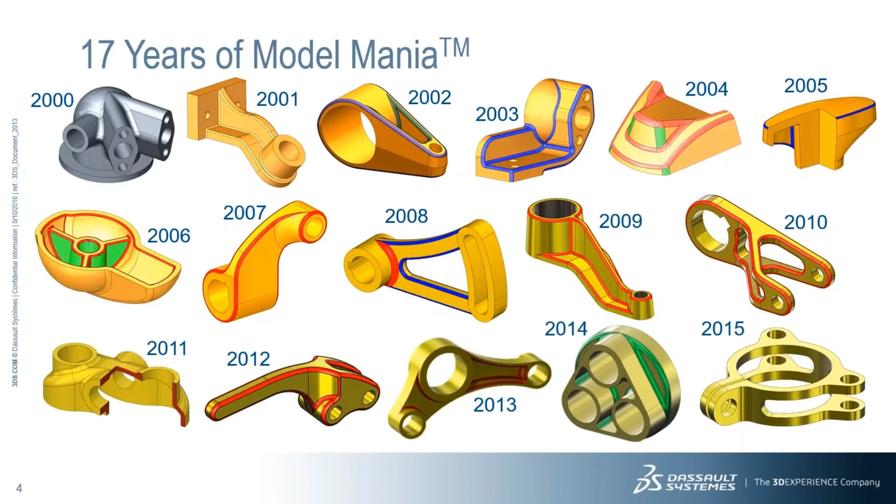There's really not that many features, and a lot of people can get them done within the 20-minute time limit. Once 20 minutes is up, you're timed out and asked to leave the booth if you haven't finished. So for 2016, this is our little part.

If you take a look at it, I always say people skilled at reading a drawing have a bit of an advantage, because you can look at the drawing and quickly determine how to approach it. In this case, it starts off with a teardrop shape that's going to be revolved, with some pockets at the top, another pocket at the bottom, and a couple of holes going into the sides at different areas.

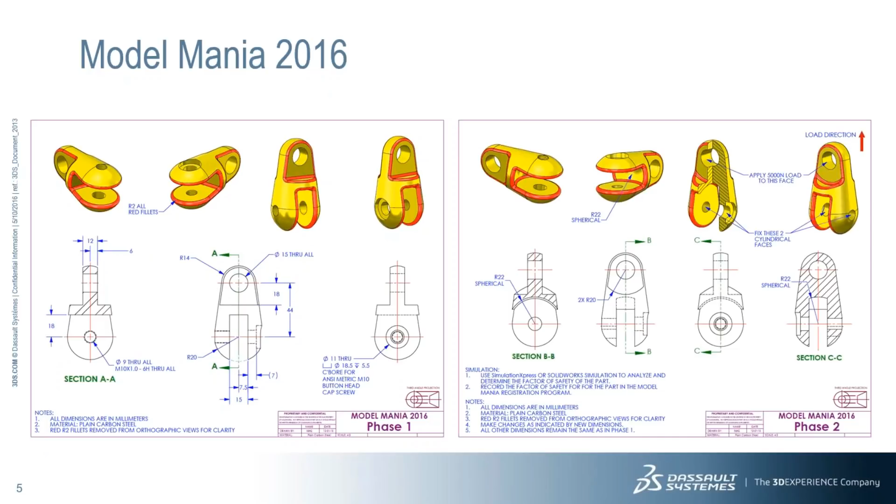Once you're done modeling that, we give you this drawing. This is the change that needs to be made, and it describes the simulation that needs to be run on the part as well. So we'll go through these two in more depth.

Here's our phase one part. A lot of times what we'll do for these is make the drawing very clear—we want to make sure people aren't trying to interpret it in different ways. So often we'll take off the fillets in the orthographic views just to make sure it's clear, and we'll identify that accordingly.

Once we remove the fillets, you can see you've got side pockets at the top, a pocket at the bottom, and that teardrop shape which is revolved. Then we define counterbore holes for a button head cap screw, and a tapped hole on the other side. This hole goes through one side, the tapped hole goes through the other, and there's just a simple 15mm hole at the top.

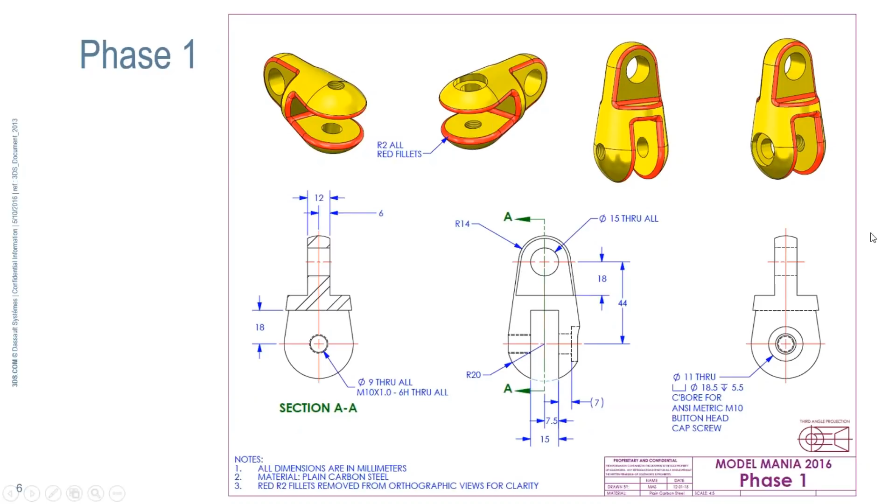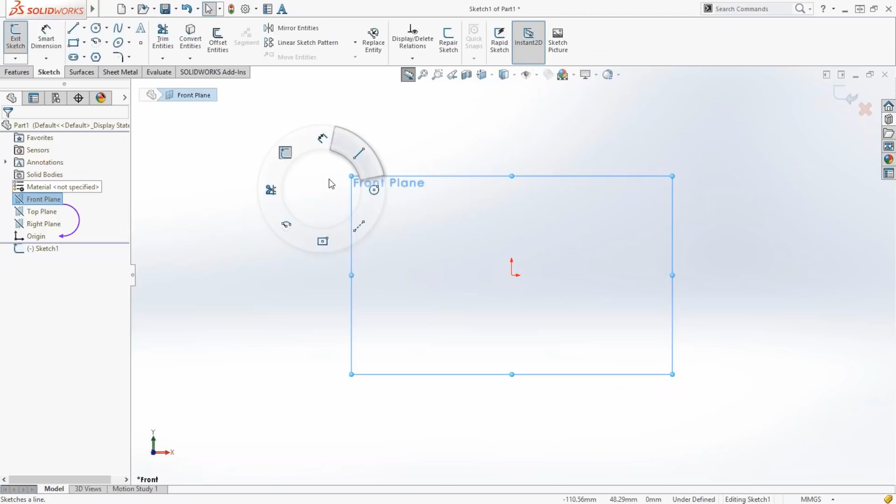So let's take a look at how we would approach modeling this. Since this question comes up nearly every time I do a webinar, I'll get it out of the way early—you'll see these things pop up on the screen as I go. If I jump into a sketch, you'll see this circular thing around my mouse. All I'm doing is right-clicking, holding down my right button, and moving my mouse around. If I swipe across that, I get to my line. That's called mouse gestures, and I'll talk about that in a second.

Another thing we have is what we call the shortcut toolbar. By hitting the S key, you have access to commonly used commands, and this is fully customizable. So let's go ahead and customize it. Here's your shortcuts bar—under customization, you can actually make any changes you might want.

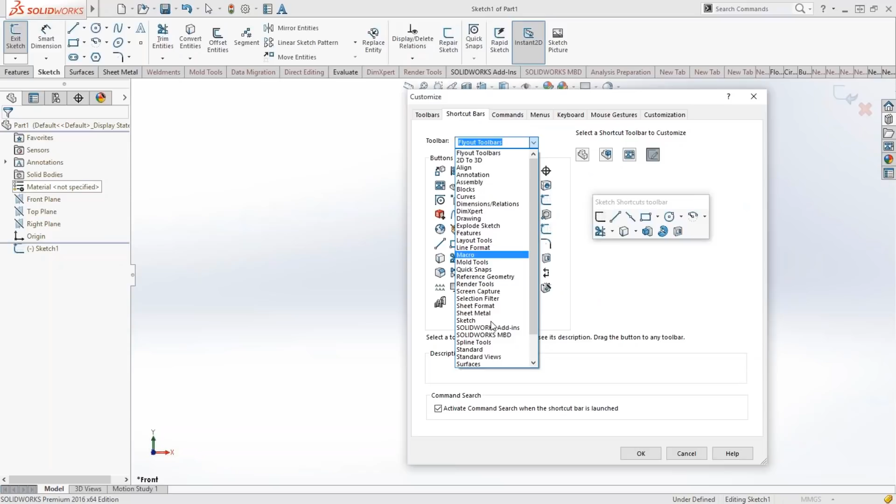You can add different things if you like. Let's go under sketch, and say you'd like to have your spline command on there—just drag it on, and if you don't like it, drag it off. These are also resizable depending on how you like to organize things. They're separate for sketch, for drawings, for part modeling, and assembly modeling, so you can have different shortcut toolbars for each, all customizable individually.

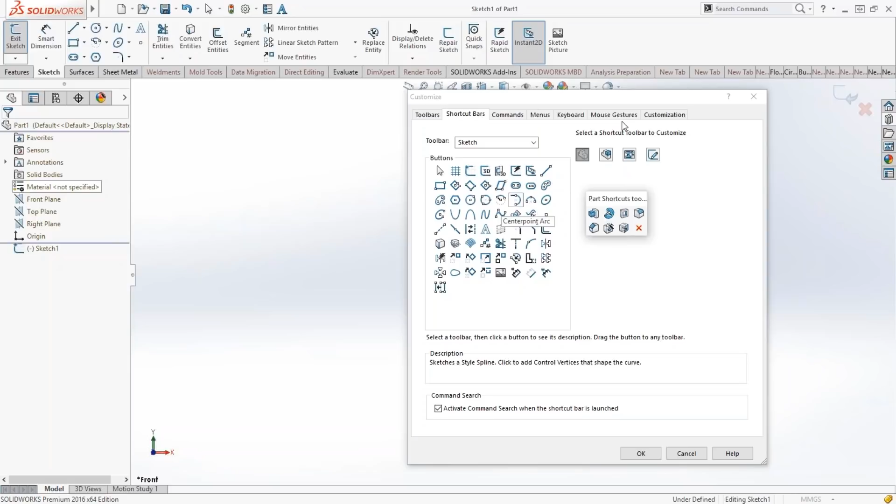Now the mouse gestures is this tab over here. I choose to have 8 gestures, but you can also just have 4 gestures in each quadrant if you want—just take a look at only the commands that have mouse gestures assigned.

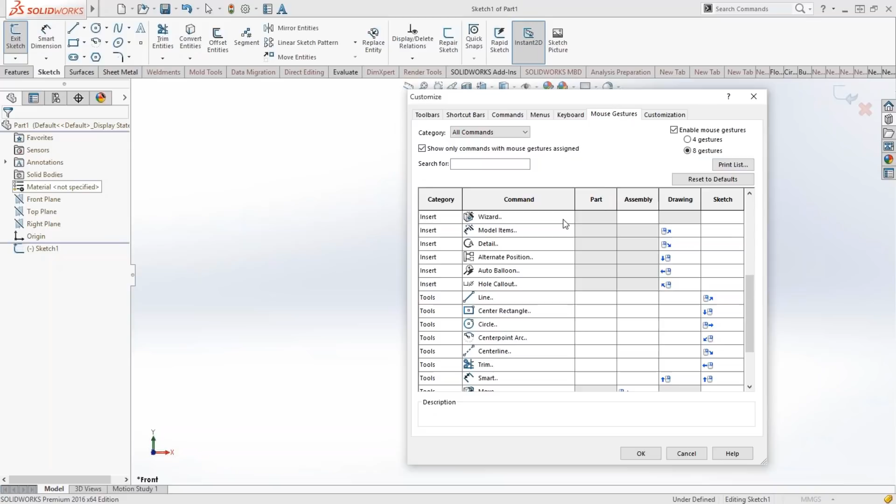Again, as we did before, parts, assemblies, drawings, and sketches can all be defined to have certain mouse gestures that are only in that environment you're in. So I'd encourage everybody to use the shortcut bar and the mouse gestures. Someone asked in an earlier seminar which one's more efficient—it's all personal preference. Some people use all gestures, some use all shortcut bar, I use both, so there's no one great answer. You'll see me using mouse gestures as I go through here, so don't be surprised when certain things pop up. I'm going to start by drawing a line.

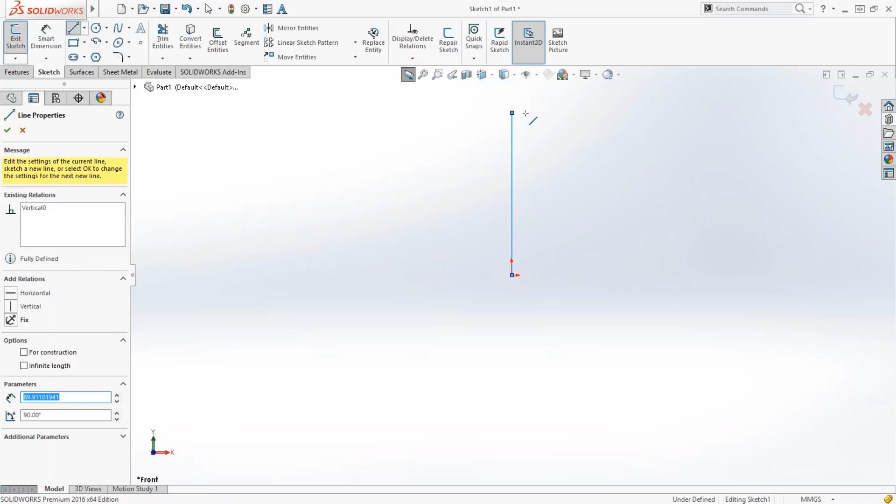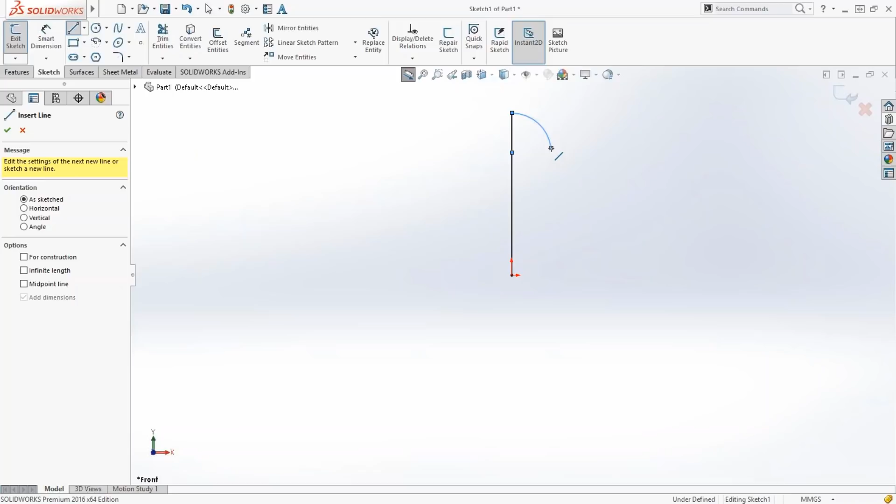I'm just going to draw a vertical line up here. Still in the line command, if I move my mouse, I'm drawing a line, but if I come back to that vertex, I transition into an arc. Come back to the vertex, go up here—it's a tangent arc, go this way, go that way, come back this way, however I want. I just want to draw an arc like this. It's a quick and easy way to stay inside the sketch without choosing a different arc tool. I'm still inside the line command, picking up tangency off that arc, going back to that vertex again, and creating the final tangent arc at the bottom.

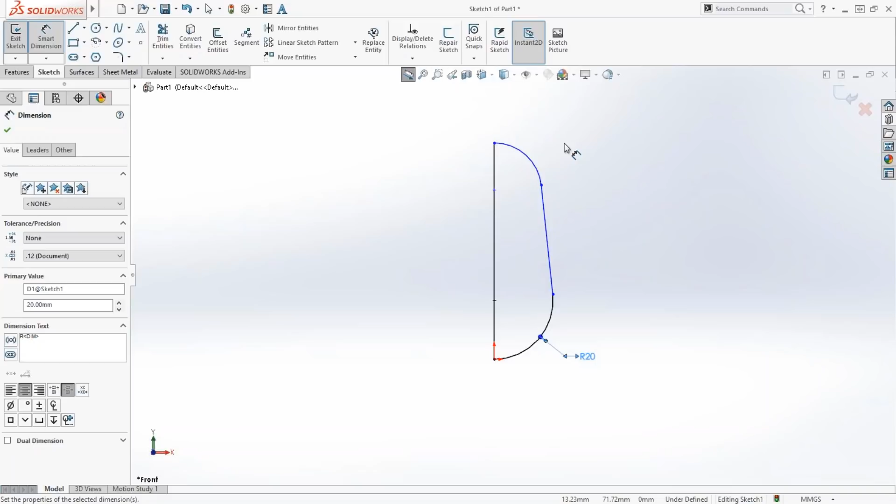Let's make these two coincident, and then we'll add some dimensions. At the bottom here, this is going to be 20, this one's going to be 14, and this dimension between centers is going to be 44.

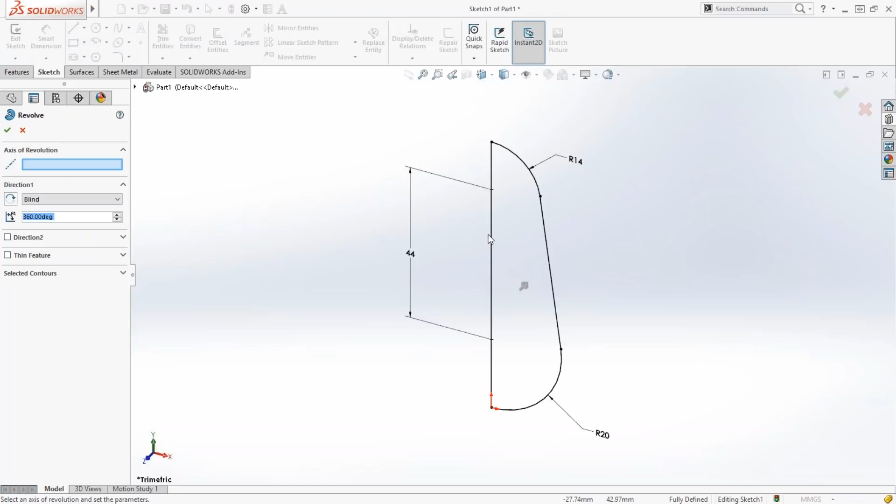So that's that. On the shortcut bar and even on my sketch toolbar, I have commonly used feature commands such as the revolve, the extrude, and the extruded cut. So I'll just choose the revolve command. My axis of revolution—you can draw in a center line or select any linear entity you have in your model—and go ahead and create your first feature.

So what I'm going to do is actually turn this sketch on. Let's see if I have my sketches turned off—I do. So I'm going to turn that sketch on, and you can see I can see my sketch and use this vertex and these vertices for dimensioning. On the front plane I'm just going to sketch in a rectangle.

This rectangle is just going to be something like this. I'm going to grab that midpoint there, if you will, and just drag it and snap it on there. That establishes my symmetry for my model. We'll add a dimension down here and make that 15. And from the center of my arc, which is the center of the arc I drew previously, up to here, that's going to be 18 millimeters. A fully defined sketch turns black, so I know it's fully defined.

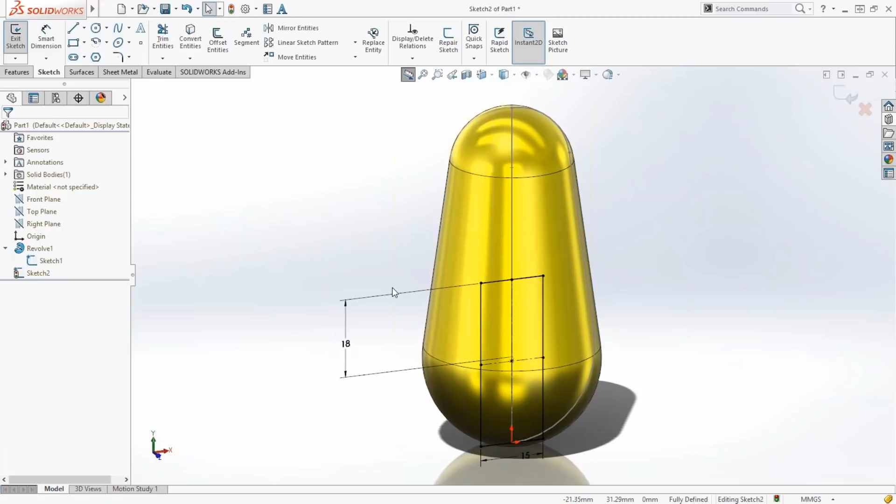And then we'll create an extruded cut. This is going to be through all, both directions. And then it cuts my pocket away—pretty simple, pretty straightforward there.

Now the next feature is these little pockets at the top. The way I originally created this model, I drew a rectangle in from this vertex up to there and mirrored it over to the other side and cut everything away. That's one way to approach it. I'm going to show you a different way, and it will actually help me down the road and give you a couple tips and tricks on the benefits of doing it that way.

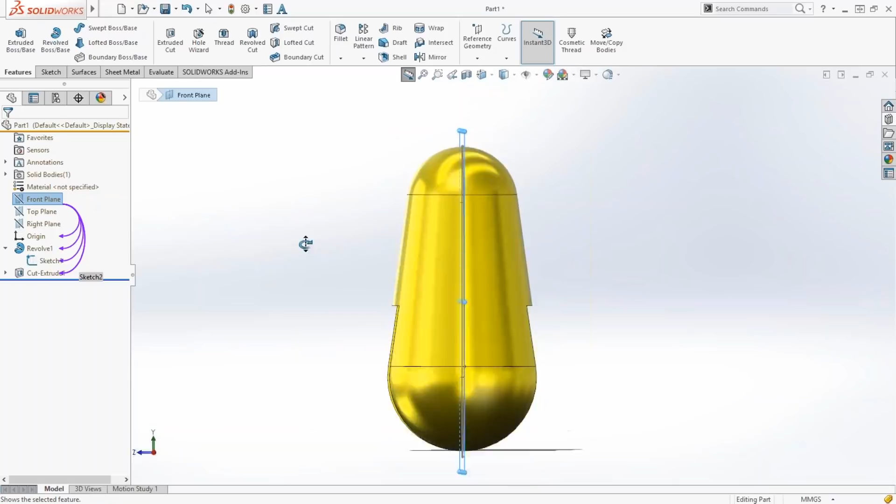So let's jump on the front plane here. That's the center of my model, and I'm going to go ahead and create a sketch. I'm just going to create a rectangle—nothing special here, something like that, real big.

I don't even need to locate it. I don't need to define it. The only thing I really need to define is from the center to the bottom, and that's going to be 18, again, just as it was at the bottom, to create that pocket.

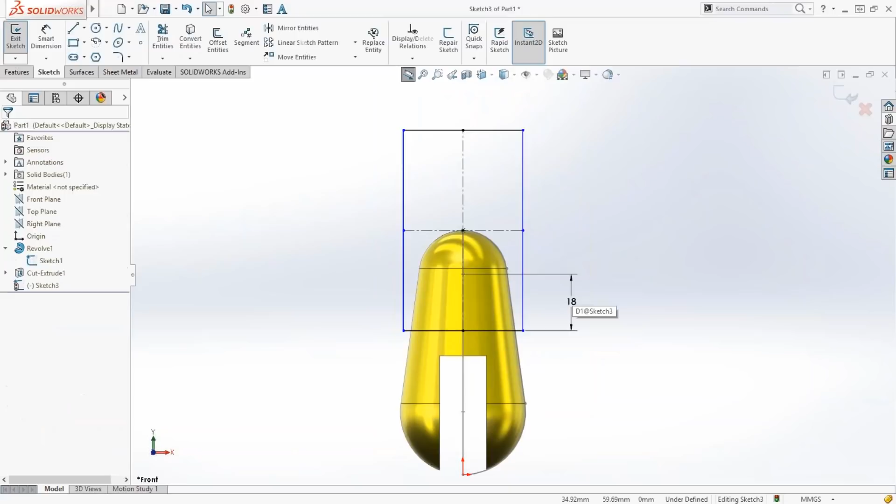Now remember, this sketch is on the front plane, but I don't really want to start cutting from my front plane. And that's okay, because SolidWorks has a really cool tool to help with that. I'm going to change the direction and say through all. So again, you can see it's trying to cut through all. I really don't want that, but I want to change my from option here.

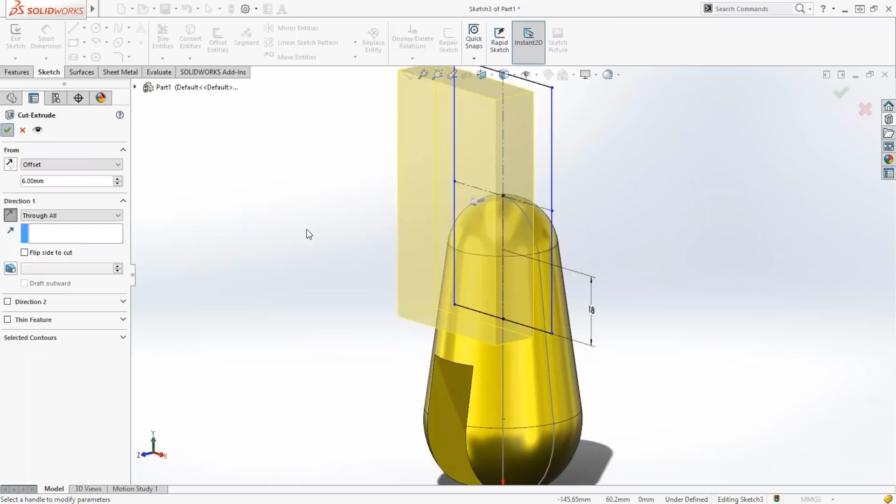I don't want to start extruding from the sketch plane. I want to offset that by 6 millimeters. So what I'm doing is still keeping that sketch, and I guess the big benefit here is I don't have to create a plane or use reference geometry to create that offset plane 6 millimeters. Just saves a step there. And the nice thing is I still have access to that dimension, so if I wanted to change that offset, I can do that directly.

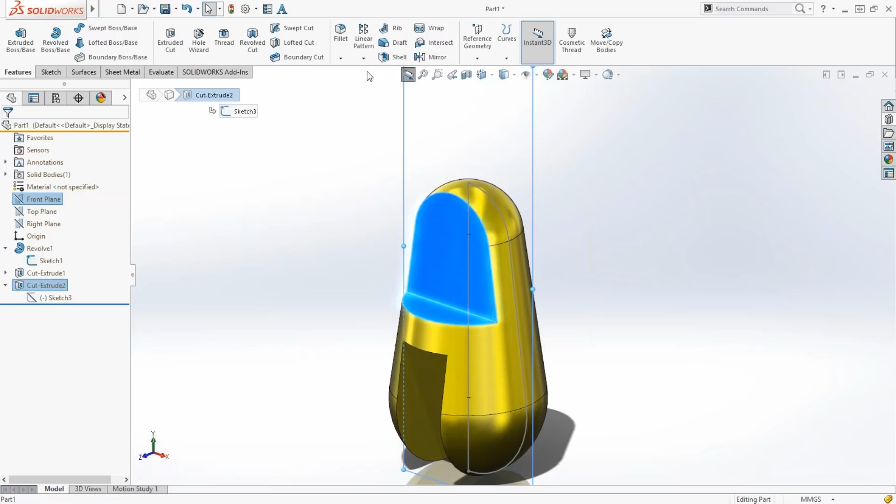Okay, so I think everybody knows here we're going to mirror that to the other side. Pretty straightforward there, no problem.

On this face, I'm going to create a hole. So it's asking - we have a 15 millimeter through all hole, and then we have these 10 millimeter counterbore for a 10 millimeter button head cap screw, and likewise the tap hole for M10 by 1 thread. So we'll put those on next.

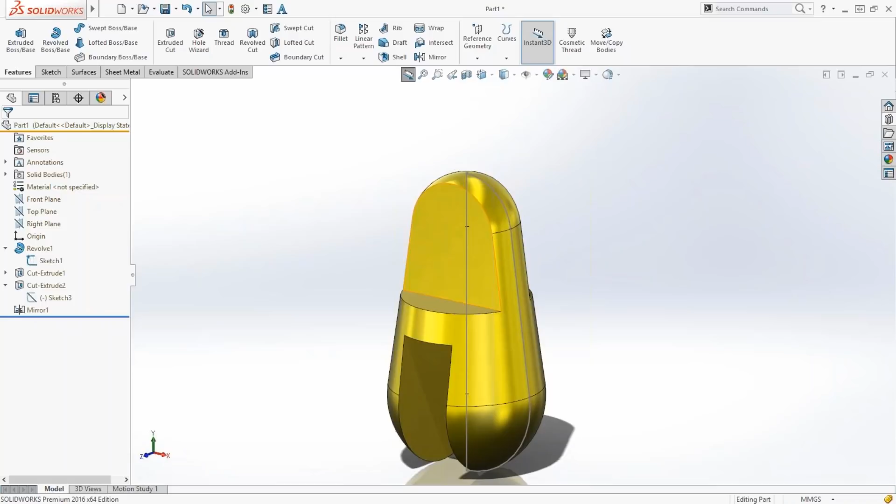So on this face here, I'll create a sketch. Now, I'm going to draw a circle, and you'll see what happens, and then I'll go back and undo some things. I'll choose that, just size out my hole, and I'll just type in 15. What that's done is it's automatically added the dimension while I'm sketching.

So how did that happen? If I just right-click in the graphics area here, you see this item called Sketch Numeric Input. If I turn that off and draw a circle and try to type in the value, it doesn't add the dimension automatically. But if I turn it on, it does.

So let me take a deeper look at what that is. In your system options, under tools options, you go to your sketch, and then you have this 'enable on-screen numeric input on entity creation.' I like to check the second one here because it only creates a dimension when a value is entered. So I'll choose both of those.

So now if I draw a circle and I don't put in a value, it doesn't add a dimension. If I do, it does add the dimension. So it's just saving me a step of having to add those dimensions while I'm sketching. While I'm sketching that entity, I key in the precise value, and it adds the dimension for me. So it's kind of nice that way.

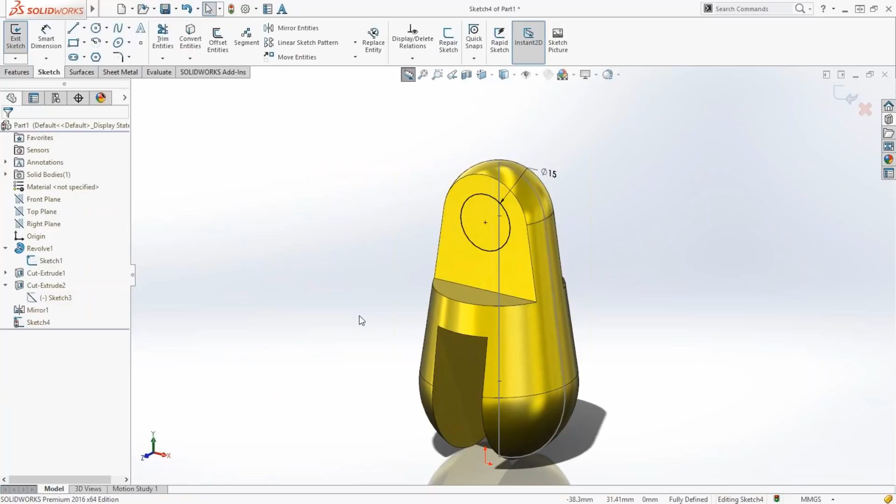We'll extrude cut, and we'll go through all, accept that. So there's that pocket there. Now what we need to do is create those holes at the bottom.

For this, we're going to use the hole wizard. Hope everybody's familiar with the hole wizard - I like to think of it as my machinery's handbook. All the information that sizes the holes, what the proper size is for a clearance hole for a 1/4-20 socket head cap screw, or an M10 button head cap screw. I don't have to look any of that stuff up or go to my slide chart or whatever.

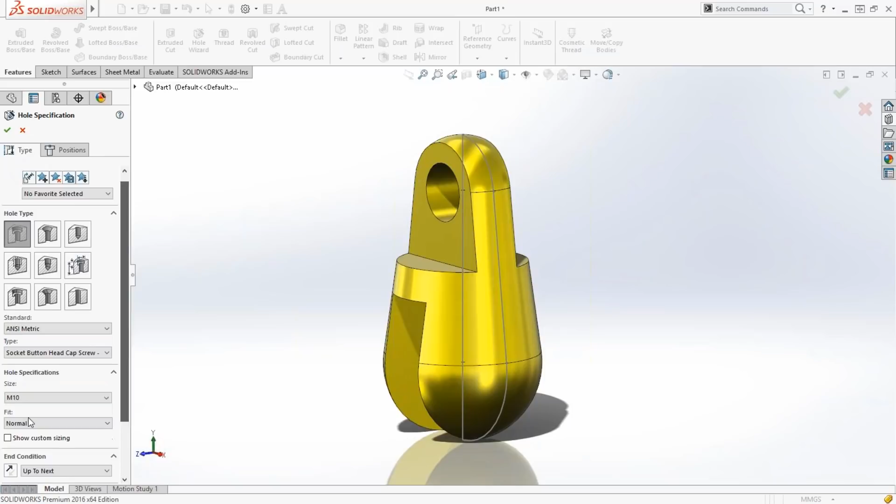So here we have an ANSI metric. I want a button head cap screw. This is going to be M10, and I want that to go up to next, because I only want to go through one side. I'm going to need to place this onto this spherical face here.

So you don't always have to place your hole wizard holes onto a planar face. You can place them onto a non-planar face as well. To do that, you can choose the 3D sketch button, or I'm just going to click this face here, and it automatically knows that I'm placing this onto a non-planar face, and then I'll place my hole right there. So that's pretty simple. If I look at the relation that exists for this, it is an on-surface relation - it knows that it's on the surface.

The other interesting thing about placing using hole wizard on non-planar faces is that instead of creating the first location sketch as a 2D sketch, it creates it as a 3D sketch. So now I'm in the 3D sketch environment, using the 3D sketch relation tools as well.

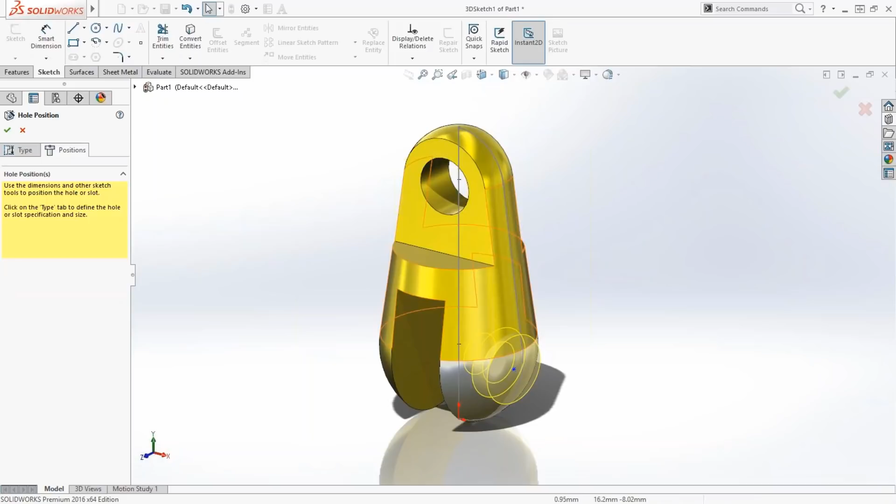Here's my x-axis, and here's the center of my arc. So I'm just going to align these along x. That's a relation available inside of the 3D sketch environment. You can see my point turns black, which means it's fully defined.

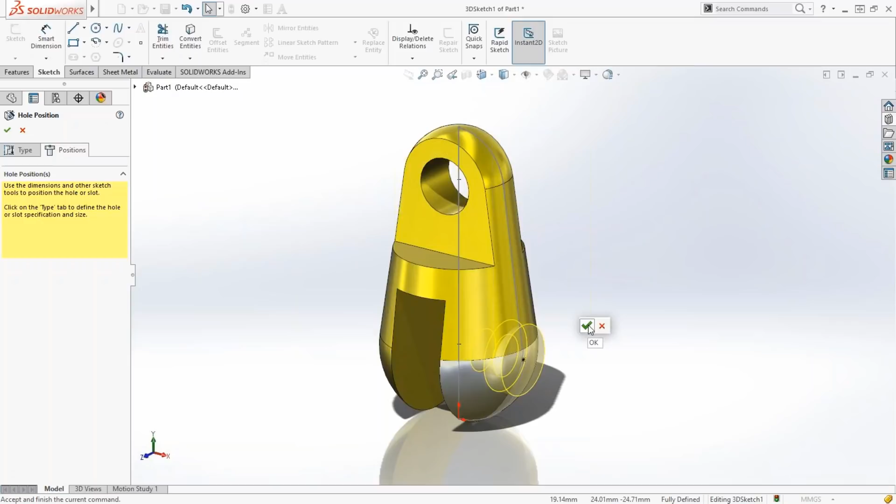If I hit the D key—actually, I'll undo that. Notice we have the confirmation corner. I can hit OK to get out of my sketch and finish the command, but sometimes I don't like to move my mouse all the way up there. So hitting the D key brings the confirmation corner to your mouse, so I can hit OK or cancel without having to move my mouse around. That's a nice little accelerator that helps you be more productive and keep your mouse movement down.

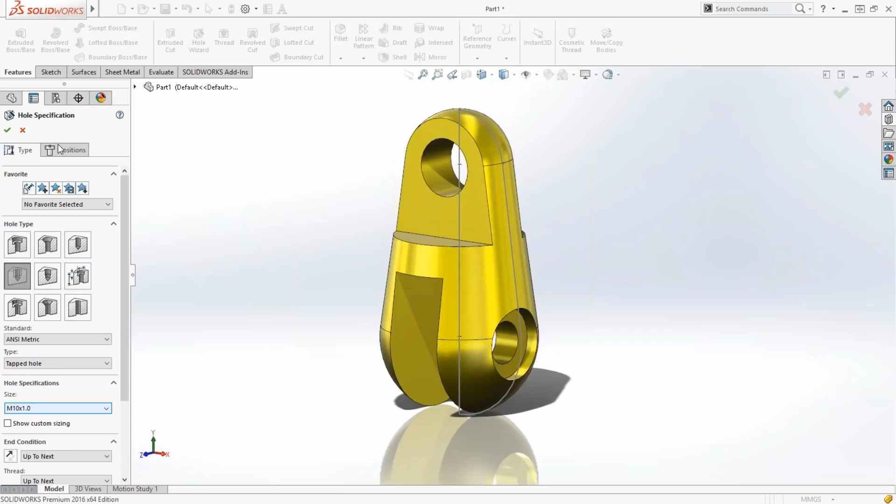On the inside here, we're going to create another hole wizard hole, and this one is going to be a tapped hole, ANSI metric, M10 by 1, up to next is fine. We'll use the positioning—I'm going to place it on a planar face and just place it right there.

Here I'm going to line these two up and give a coincident relationship for those two, so that lines up properly. Hit the D key and we'll hit OK. So there's the geometry that we have without the fillets on.

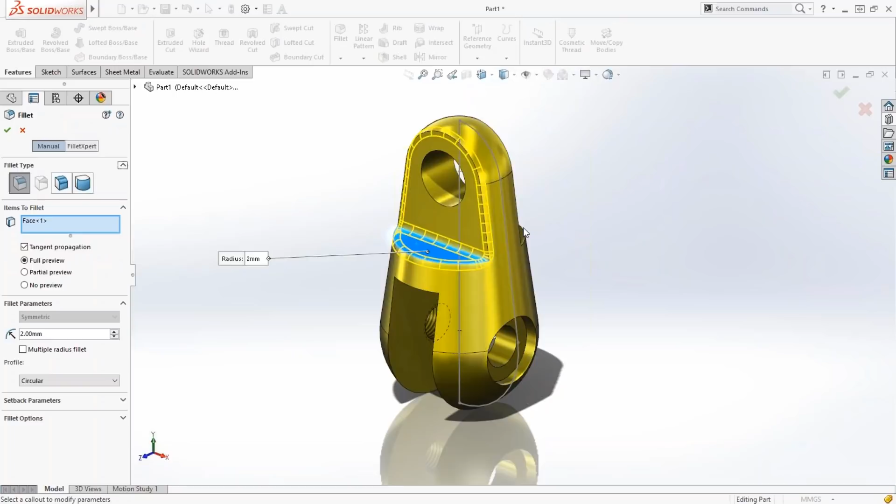Then the last thing we want to do is add these fillets. You can see these fillets wrap all the way around, all the way around, and all the way around that. So let's go ahead and add our fillets—it's going to be a 2mm fillet. I'm going to choose just these faces here, and notice it wraps around because it's grabbing all the edges associated with that face, but any tangency as well.

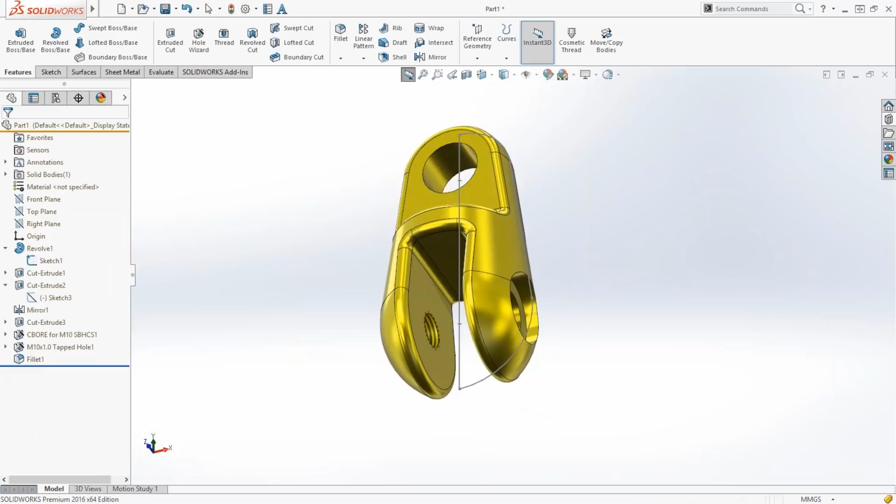If I choose this, it's going to give me a fillet around that circle or hole there, and I don't want that, so I'll unselect it. Finally, down here we'll choose this face as well, and you can see it added all the fillets properly. This isn't necessary, but especially for Model Mania, I like to add a little color to these because it helps me visualize and see whether I have all my fillets accounted for, and whether I got all the edges prescribed on the drawing to be filleted.

Then the last thing we need to do is add plain carbon steel. On your right click, you have all your favorites listed here. If you ever go to SolidWorks World and sit down to try the Model Mania challenge, a tip here is that I always put the material in your favorites so you don't have to go into edit material. If at home you want your own favorites, just go into Edit Material.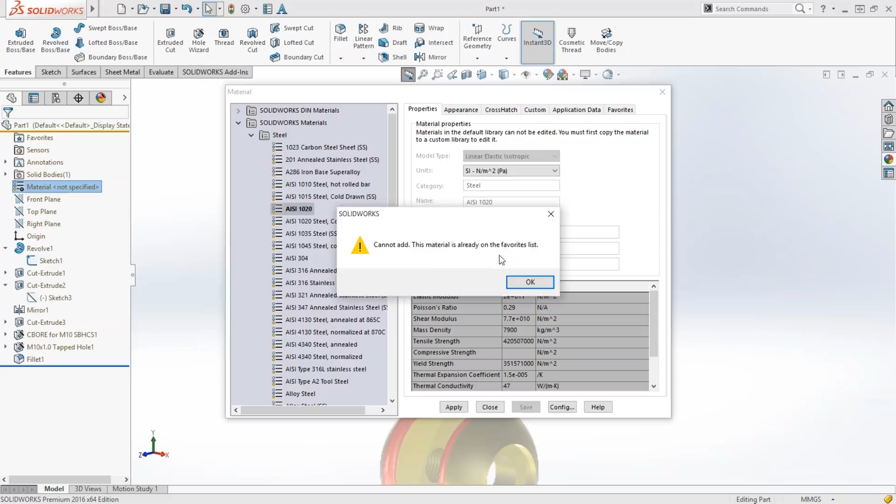Here you have your list of all available materials. Choose one like this, right-click on it, and say Add to Favorites. If you click Add to Favorites, it's already on the favorites list. This tab over here has all your favorites already there. So if you have certain materials you use quite often and don't want to come into this dialog box very often, add them to your favorites, and then they're right there on your right click to add your material.

So that's the phase 1 portion of Model Mania 2016. We've got our part all done. Once you're done with that, we give you another drawing, which shows some changes that we're going to make to that part. So here's the changes that we're going to make.

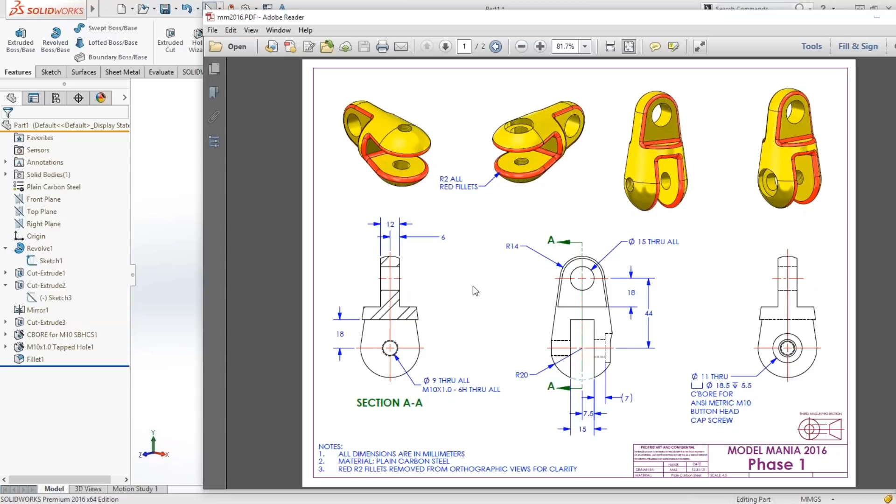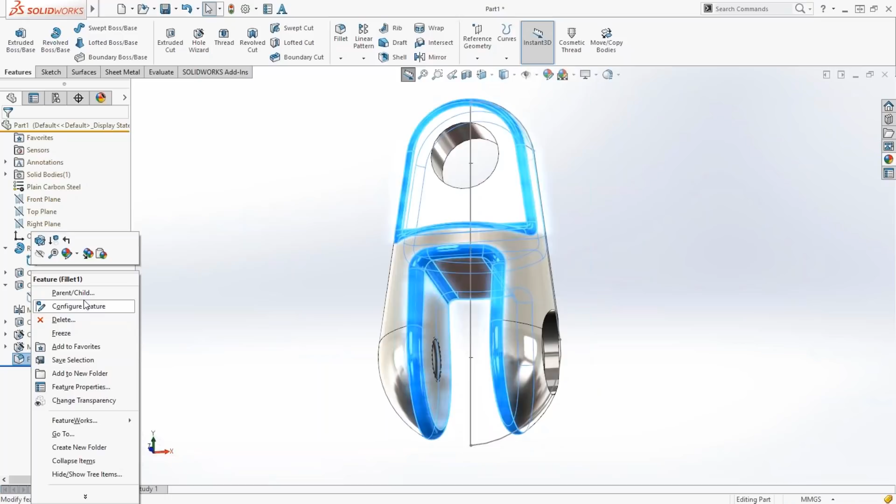So that's that. Here's the simulation. We'll come back and talk about that once I get the modeling done. So how are we going to approach this? This face needs to go away and needs to become cylindrical. This face needs to go away and needs to become spherical.

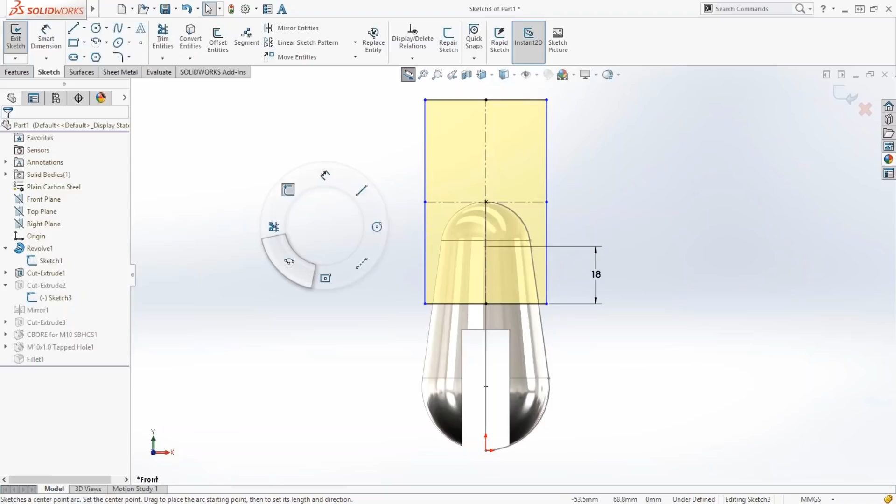So first one first, let's take the easy one. This one's going to be easy, because of the way I define this, it's actually fairly simple. I'm going to come in here, and I'm actually going to do this the wrong way because I want to show you a little capability that we have. So if I take this here and say, okay, I want to put that 20 millimeter arc on there, let's just draw in a center point arc from the center, from here out to there. That's my arc.

Some people on the phone are saying, no Mark, don't delete that line, that's not the right way to do it. You're right, that isn't the right way to do it. But I'm going to do it the wrong way in case some people aren't familiar with this.

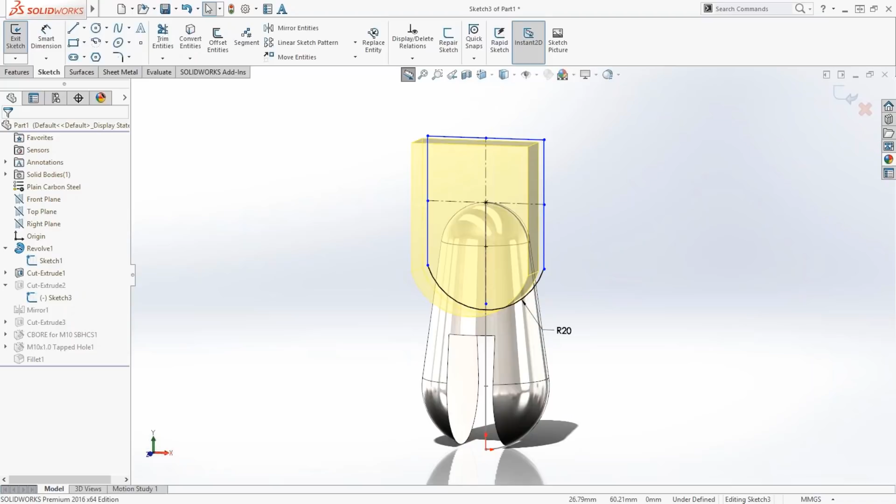So I deleted the line, I put R20 on there. I don't really worry about any of those up there, and I hit exit. So what happens? My fillet fails. Well, that's because I replaced that line with an arc, and it didn't know to swap those out. So I'm going to use the undo command and come all the way back here to my sketch delete.

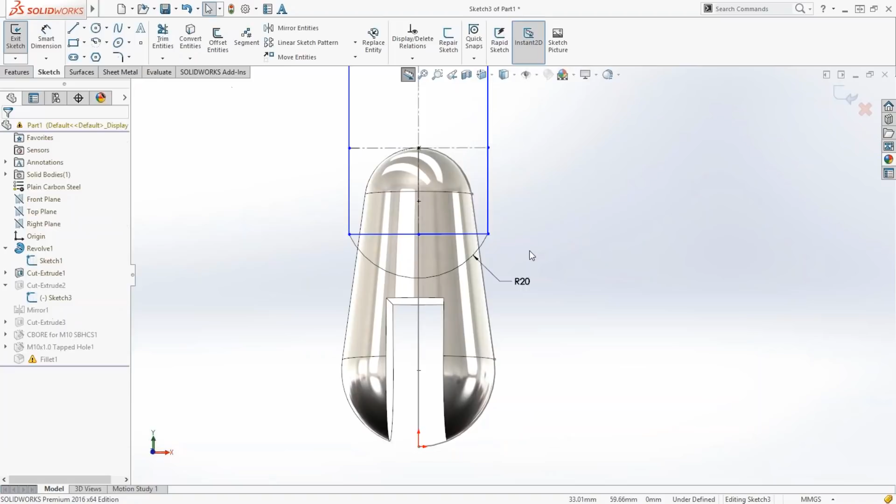So here I am at sketch delete. I'm going to delete this dimension, and we'll put on the 20 millimeter dimension, something like that. So the better way to approach this is to use the replace entity. So I can choose this guy right here, and I can say I want to use replace entity. Replace entity, replace this entity with this one, and I can either choose to delete that entity or make it construction. We'll leave it construction for now.

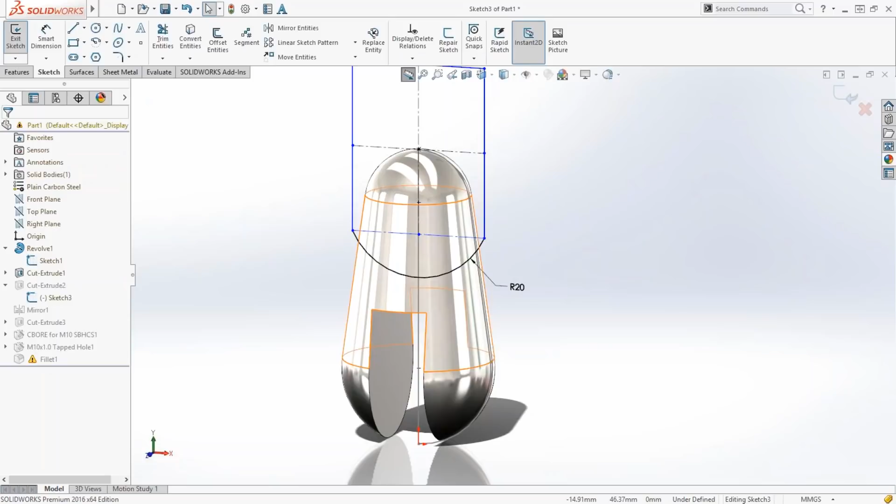So I want to replace it with this one. So what I'm doing is I'm telling SolidWorks, redefine whatever was associated with that edge to now be tied to that line, whatever that created a planar face, to now assign it to this one, and now it's going to take care of that for me. So you can see it made that construction. This is now an arc or a cylindrical face, so when I exit out of my sketch, my fillets don't fail because the face identifier for this particular face was reassigned, and SolidWorks took care of working out the fillets for me.

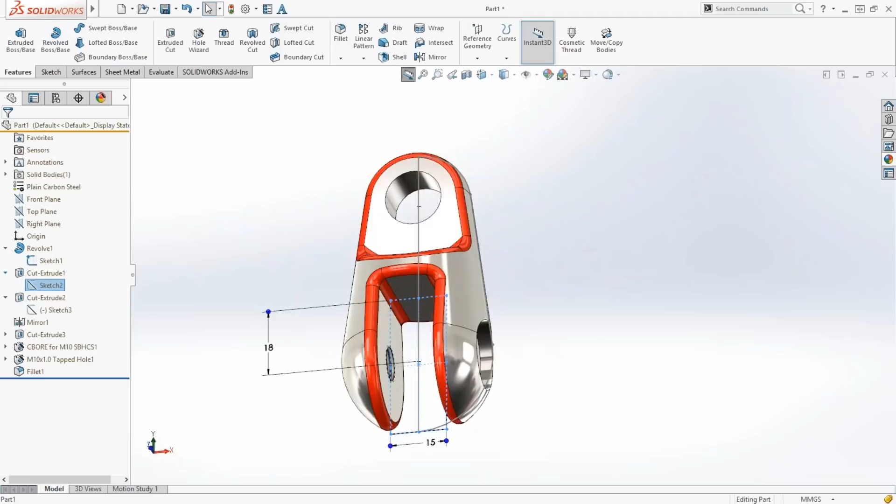Not going to be that easy for this spherical face down here. The way I defined this from our previous sketch here is a rectangular cut, went through my model. I could try to go in here and change it, delete it as an extrude, try to change it to a revolve. I can do all kinds of things like that, but it gets a little bit more involved. So I'm just going to roll back before that fillet there, and I'm going to define a spherical surface.

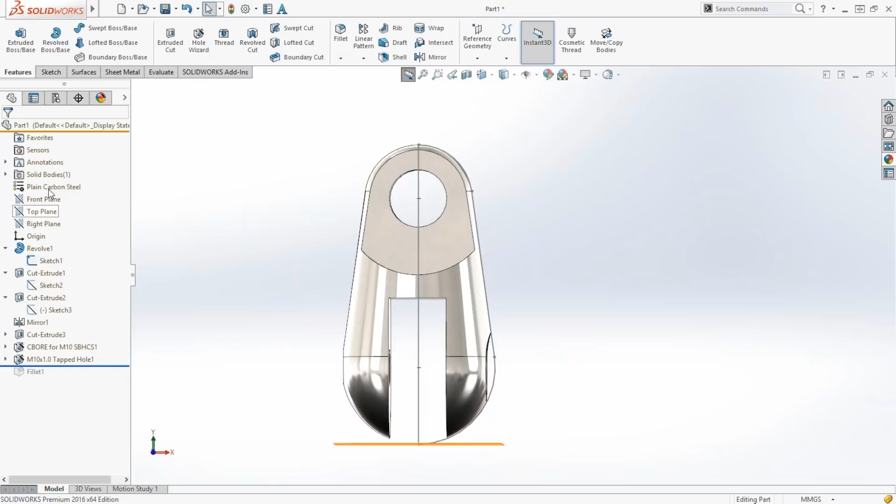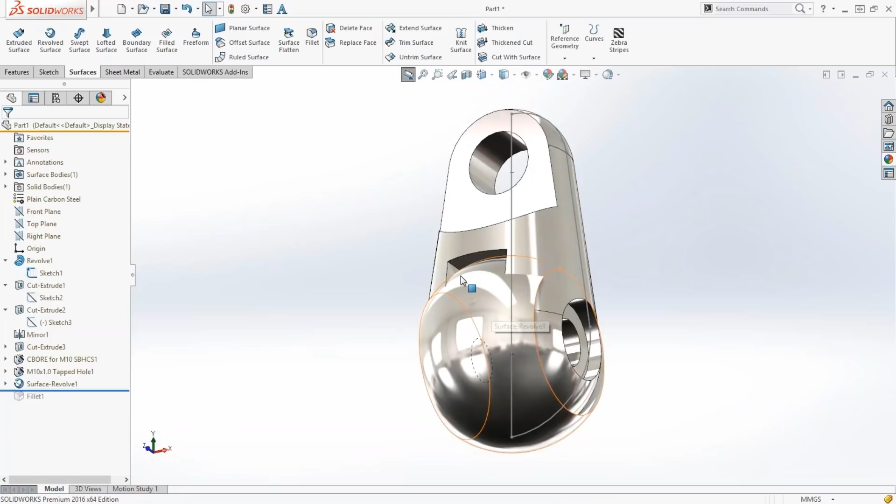So instead of a solid entity, I'm going to define a spherical surface. We'll sketch in a center point arc from here to here, something like that. It's going to be 22 millimeters. And we'll put in a center line, and we'll revolve that as a surface. So that's now a surface that I've placed into my model to replace a face. The Replace Face feature on your Surfaces Command Manager tab is the tool that we want to use.

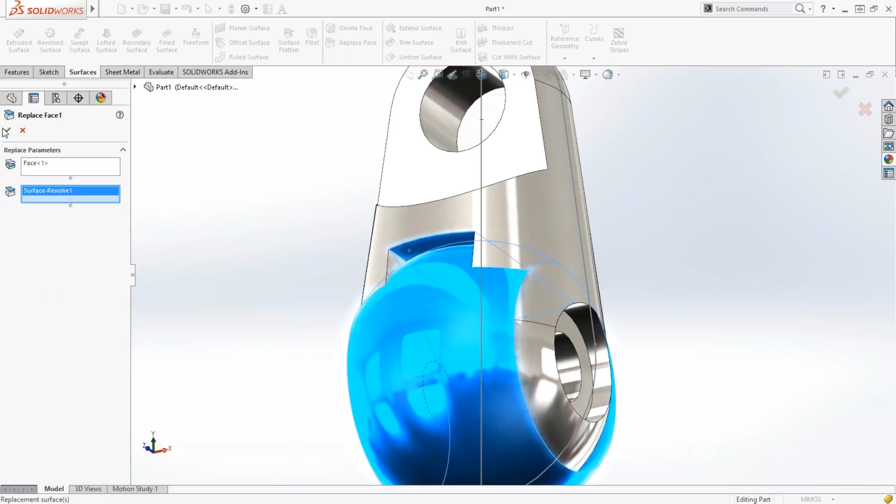I'm going to replace a solid surface with a face from the surface that I just created. So I want to replace this with this, and I'll hit, oops, I'm going to replace this with this. So I'm replacing one with a different surface, and you'll see what happens. So it actually replaced that. I could hide this, or I could just hit the Tab key. Tab key works now in part mode, very similar to the way it works in assemblies.

You can hide a part in assemblies. Well, now you can hide bodies, surfaces or solid bodies, inside of part mode.

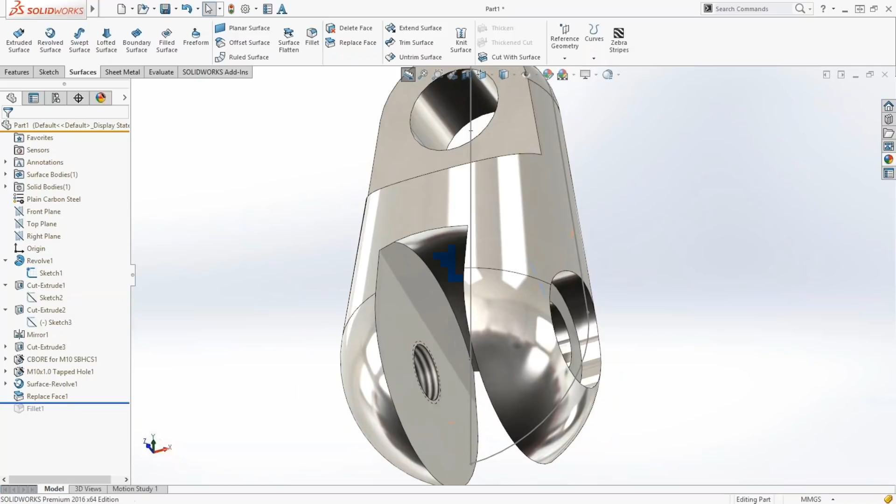So you can see I used replace face to actually redefine that face to now be spherical. When I rebuild my fillet, I changed the face.

The face IDs don't match back up when I do it that way, but I can easily redefine that. You can see it's got a missing face. I could delete that, but I tend to be lazy, so I'll just hit enter and let SolidWorks remove that for me. You can see it did a nice job there.

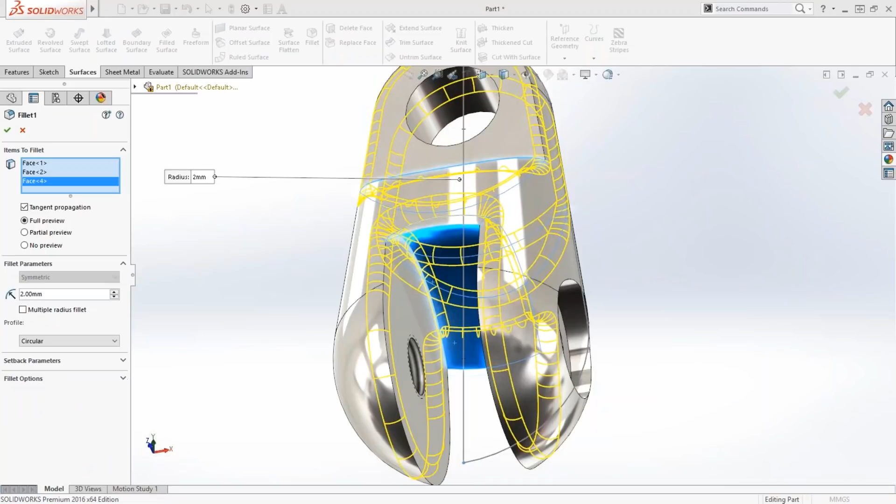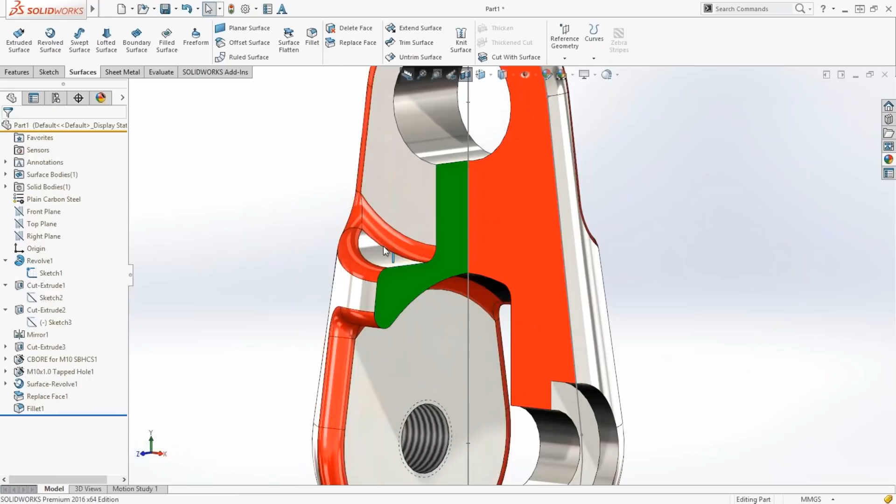You can cut a cross section of this. If you just did a standard planar two-section cross section, you can see that I now have that. Or if I use the zonal option up here, it allows me to just make that quarter cut section, which is kind of nice. You can see I now have my cylindrical face here and my spherical face on the bottom. That works out pretty well.

So once we get that done, we ask you to run simulation. We're asking you to hold these cylindrical faces, these two cylindrical faces, and then apply a 5,000 Newton load in the vertical direction. So let's jump over here.

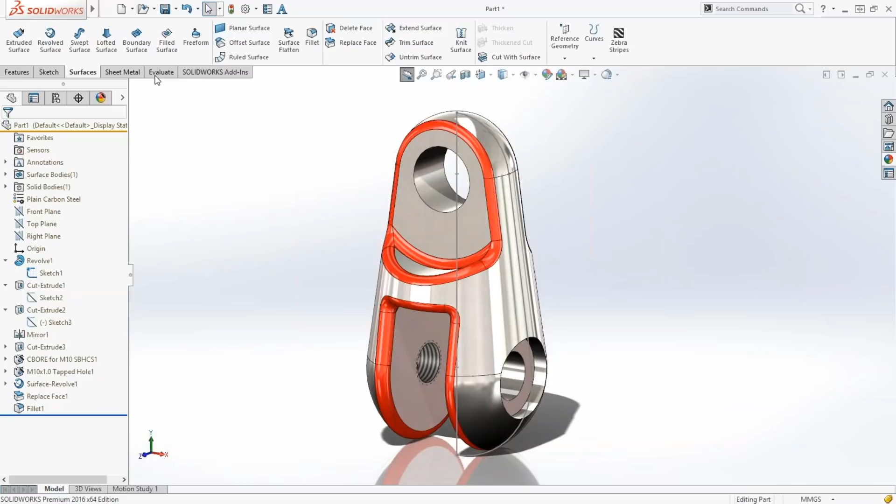I could use SolidWorks Simulation. I'll actually use SolidWorks SimulationXpress because a lot of people aren't familiar with it. I just want to show you how easy simulation can be.

So the first thing it does is take you through this wizard. It gives you a little bit of introduction that you can read through. Hit the next arrow, and you can see I've got fixtures to define, loads and materials already defined, and then we'll hit run and view our results.

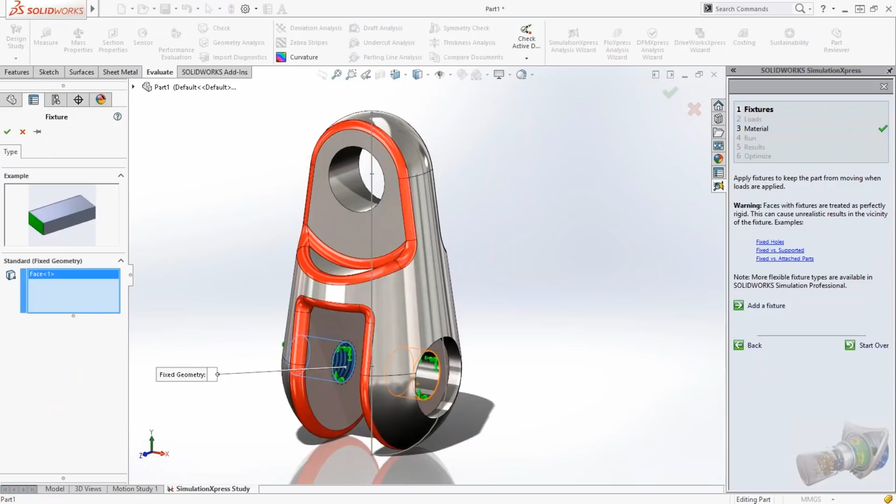So let's add a fixture. I want to hold this and this. Okay, now we say next. I'm going to add a force. You can see it added the nice little icons there to let me know that's fixed.

I'm going to add a force to this face, but I don't want it to be normal to the face, I want it to be in a selected direction. That direction is going to be to the top. I want 5,000 newtons. So there's my load, you can see that's on there.

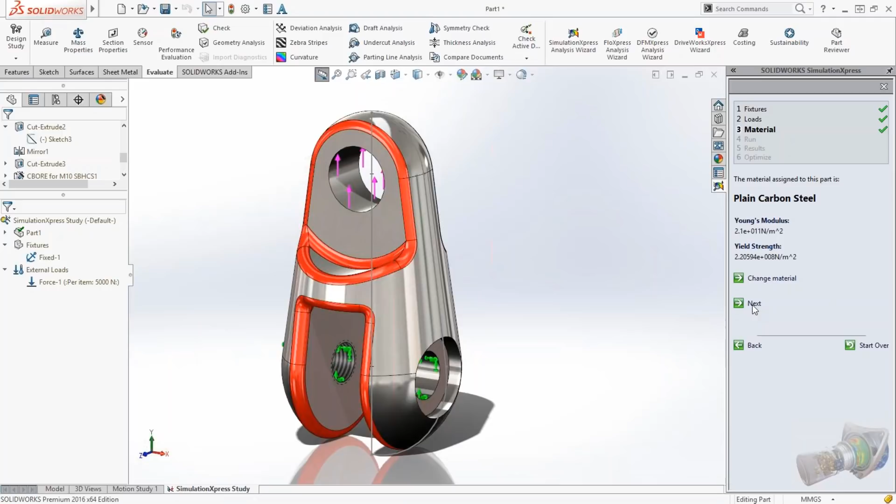Materials already defined, so we'll hit next. I could change it at this point. Finally, the next thing I want to do is just run my simulation.

That's it. So the first thing SolidWorks does on the results is it says, hey, is it behaving as you would expect it to? Yeah, you can see it's doing a little animation, obviously exaggerated, of the deflection that would take place. And yes, it is behaving as I would expect.

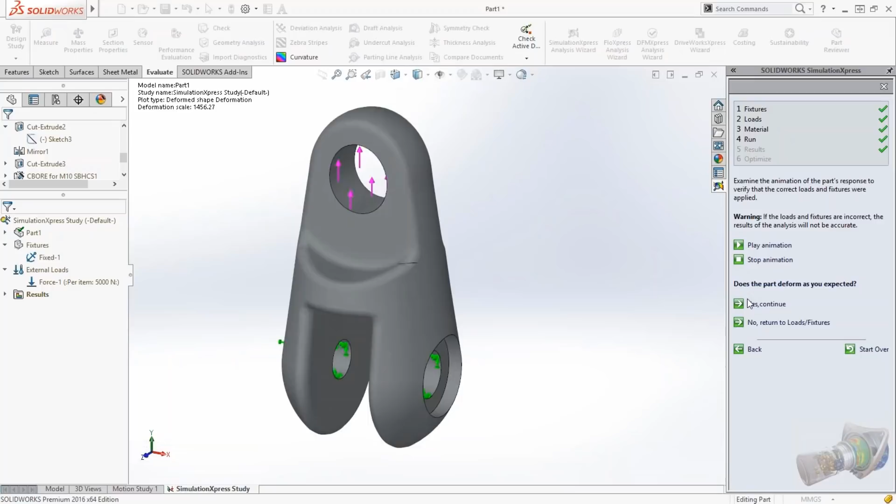Do I want to see my stress information? So there's my stress information for my part with the values listed. I can also look at displacements, how much is this thing actually moving. Very small because it's a pretty beefy part.

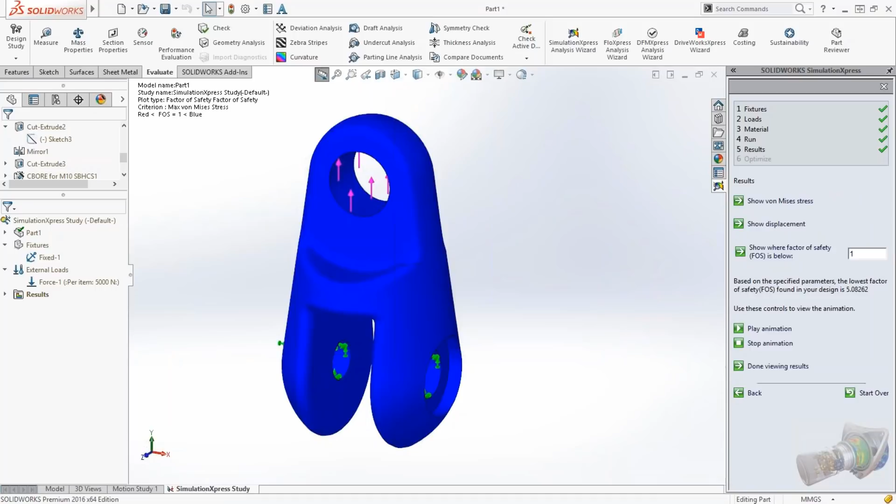Or I want to see my factor of safety. My factor of safety is about 5.1 for this part. If I just say only show me the factors of safety below 10, you can see these are all the ones below 10. 10 is a pretty high factor of safety, 5 is actually a pretty high factor of safety too, so we're within our limits.

But this is the number that we want you to report. So obviously to get the best results for this, you have to have an accurate part, you have to get your factor of safety right, and then we judge it on time. So that's the Model Mania for 2016.